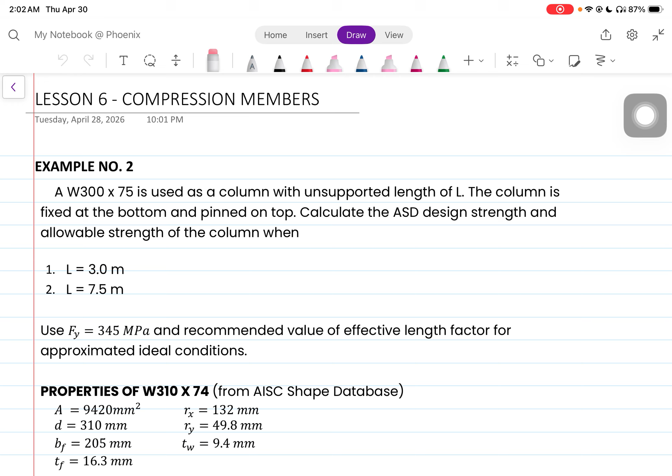The column is fixed at the bottom and pinned at the top. Use Fy equal to 345 megapascals and the recommended value of effective length factor for approximated ideal conditions. The properties of the wide flange are given to us.

Take note that we're told to use the recommended value of the effective length factor, since it's given to us. When we say unsupported length L, that means the span without support—the support is only at the ends.

We're given that the column is fixed at the bottom and pinned at the top. So if we draw this, fixed at the bottom and pinned at the top means our K will be equal to 0.8, using the recommended value.

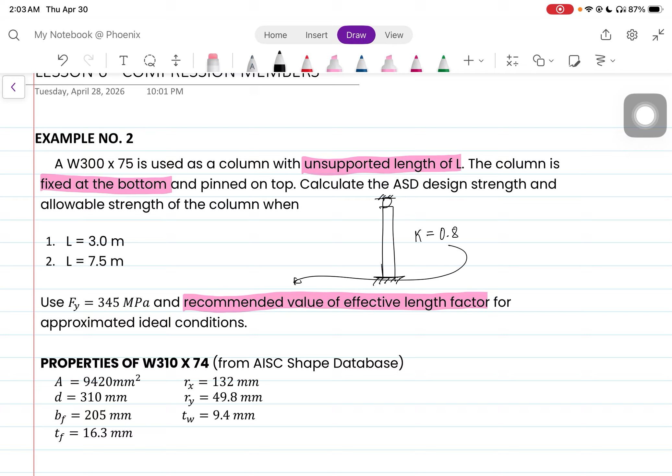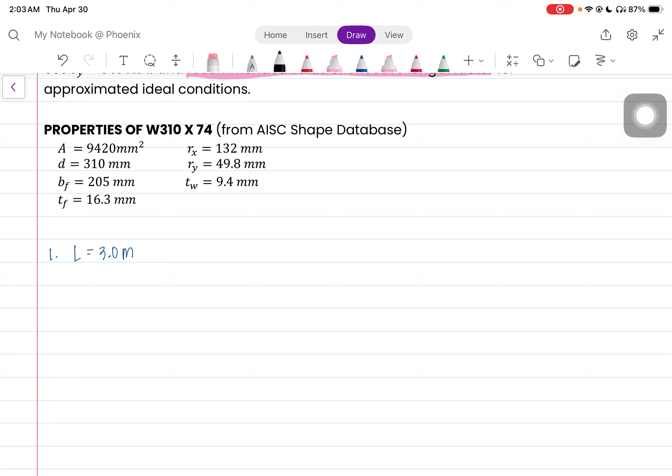Let's first solve for the design when length is equal to 3.0 meters. Step 1 is to get the slenderness ratio, SR. Let's solve for SRX, which is KL over R.

We're given R, both RX and RY. Our K is 0.8 and the length is 3,000, divided by our Rx of 132. So SRX will be equal to 18.182. Next, let's solve for SRY using KL over R.

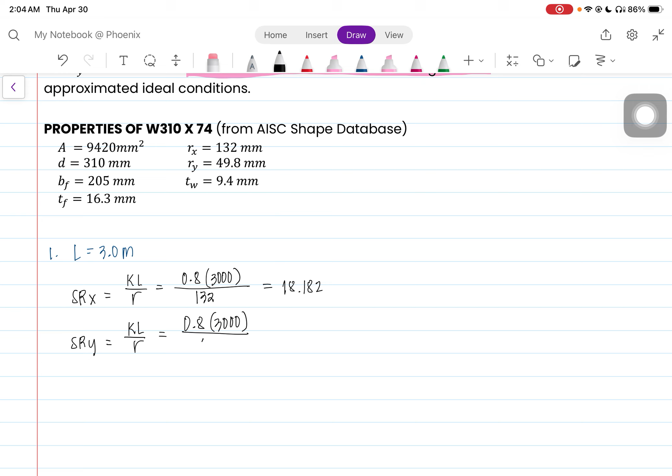Since there's no brace mentioned anywhere in the unsupported length, it stays the same: 0.8 multiplied by 3,000, divided by the RY of 49.8. This gives us 48.193. Since SRY is larger, SRY governs. Let's store this as A.

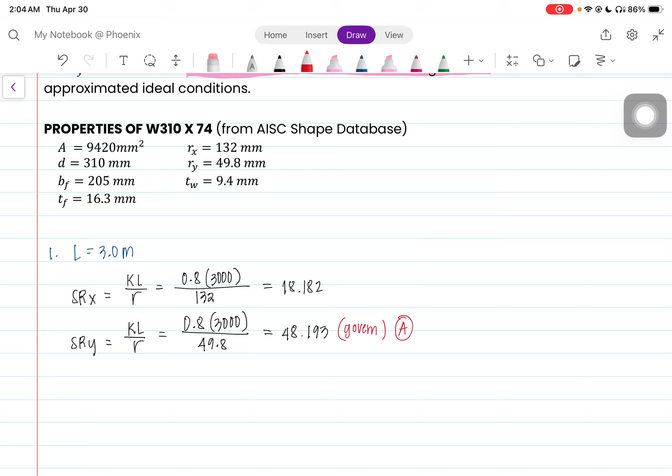Next, let's solve for CC, using the square root of 2 pi squared times 200,000 megapascals, divided by Fy which is given as 345. What we get here will be equal to 106.972. Let's store this as B.

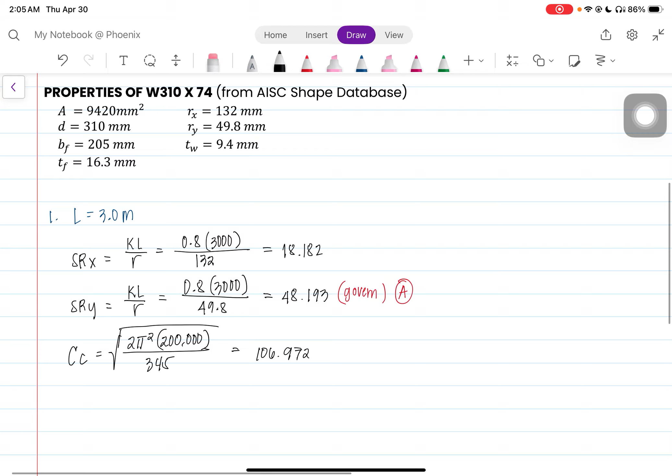Next is to compare. Comparing our SRY to CC, CC is greater. Therefore, this is an intermediate column.

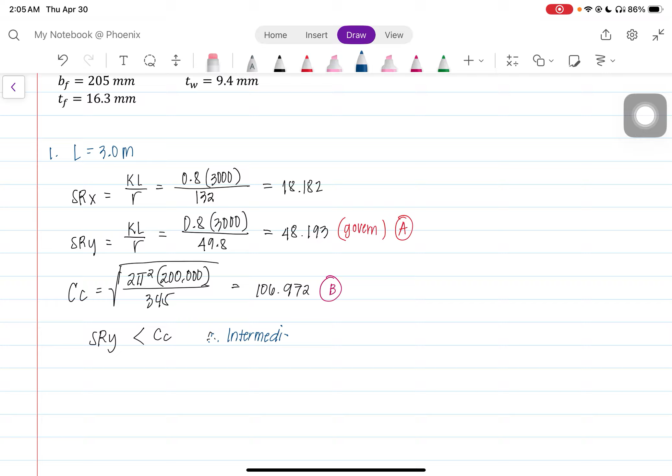Since this is an intermediate column, we first get Z. Z is just equal to SRY over CC, where SRY is stored in A, divided by B. What we get here is 0.4505, and let's store this as C.

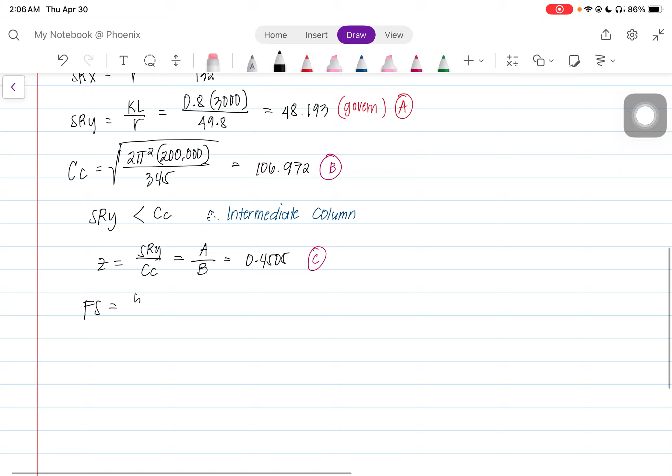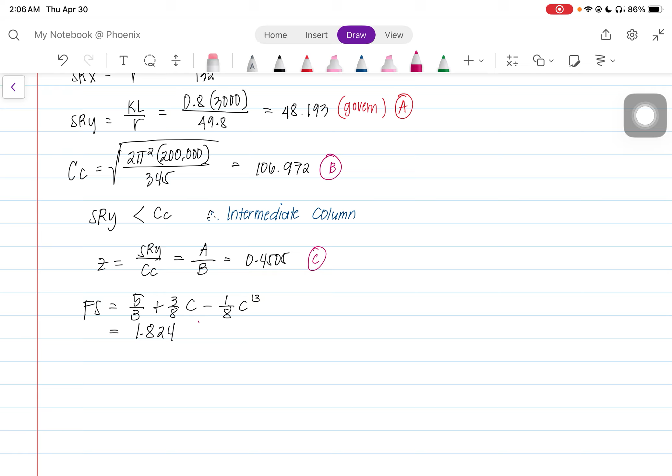Before we proceed to getting FA, let's first solve for FS. Our FS is equal to 5 over 3 plus 3 over 8 times C, minus 1 over 8 C cubed. What we get is FS equal to 1.824. Since that's a long value, let's store it as D.

Next is to solve for FA. Solving for FA, that is 1 minus 0.5 C squared, multiplied by Fy over Fs. Substituting the given values: 1 minus 0.5 C squared multiplied by 345 over the value stored in D. What we get for FA will be equal to...

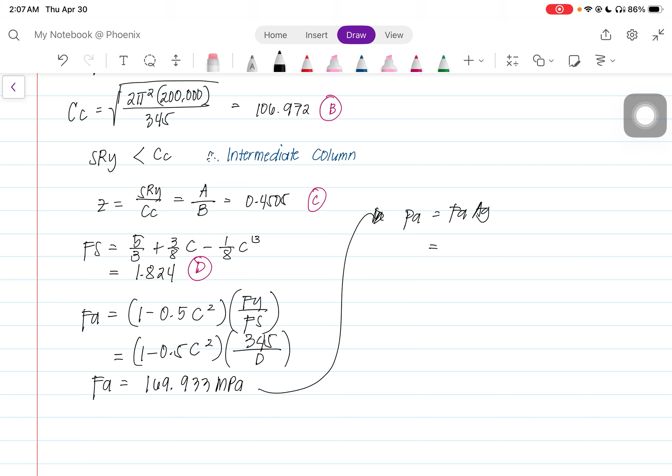169.933 megapascals. But since we're talking about strength, we need to get the value of PA, which is equal to FA multiplied by AG. So this is 169.933 megapascals multiplied by the area.

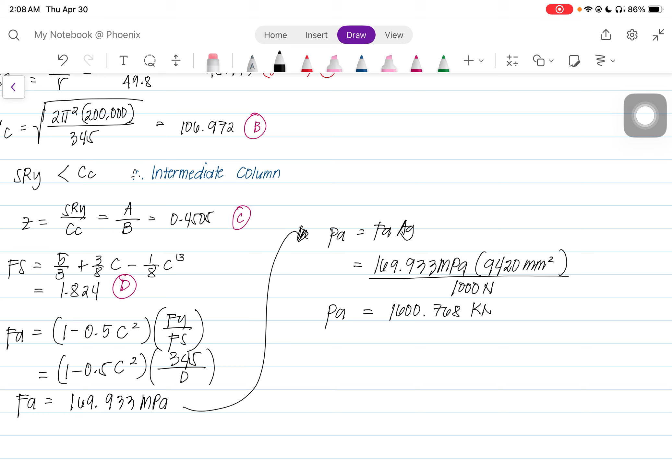Is an area given? Yes, that is 9,420 millimeters squared. Let's divide by 1,000 so we get kilonewtons for our result. So PA will be equal to 1,600.768 kilonewtons. That is your final answer.

Next, we're told if L is equal to 7.5 meters. If that's the case, let's solve for our SRX and SRY. But since we already established that SRY governs, let's just get SRY, which is equal to KL over R.

Our K is still the same, 0.8. But our L will now be equal to 7,500, divided by the RY of 49.8. What we get here is 120.482. Let's store this, replacing the previous value of A.

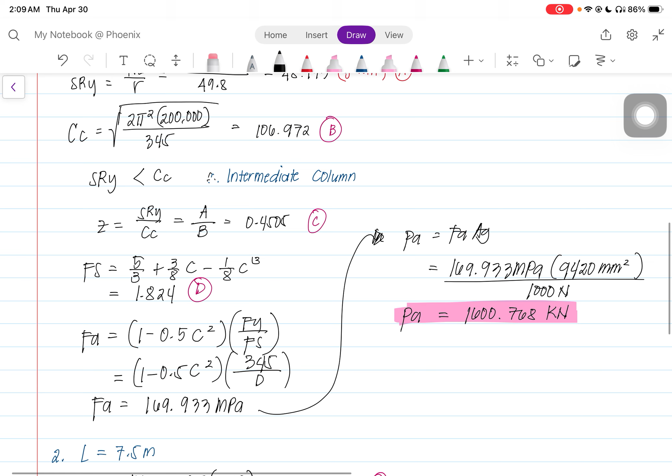Next, will CC change? No, right? Because it stays the same—the elastic modulus didn't change, and our Fy didn't change either. So CC is still equal to 106.972.

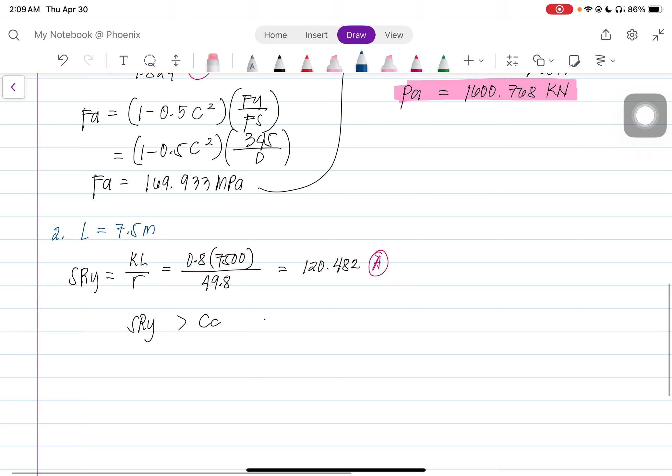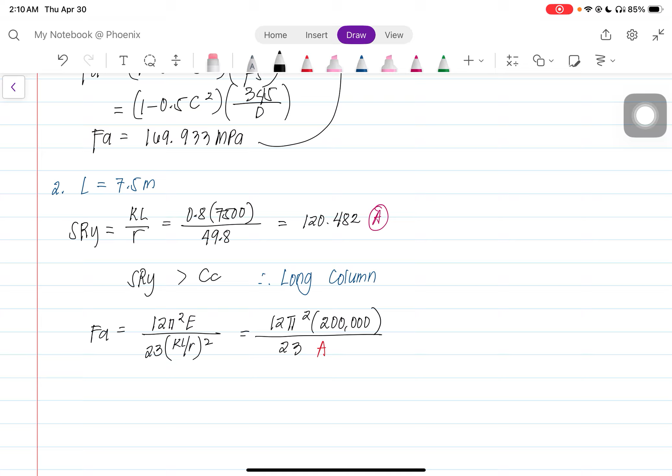So substituting: 12 pi squared, our E is 200,000, divided by 23 times KL over R, which is stored in A. Don't forget it's squared. Therefore, the value of FA will be equal to...

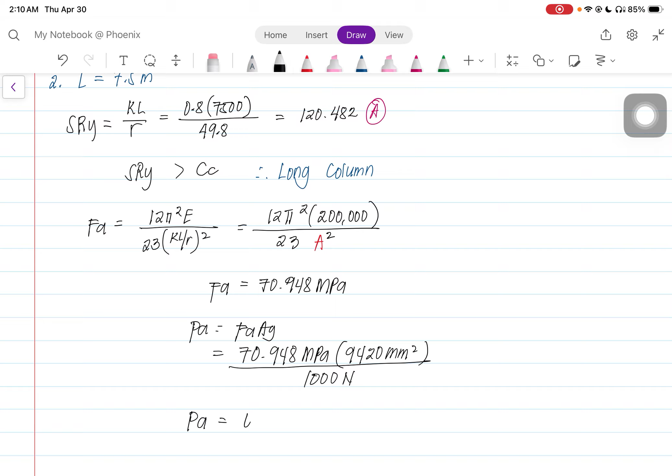70.948 megapascals. But since we're talking about strength again, we have to multiply it by the gross area: 70.948 megapascals multiplied by the area gross of 9,420 mm squared. Then we divide by 1,000 Newton to get kilonewtons for our value of PA, which is 668.329 kilonewtons. This is now your final answer.